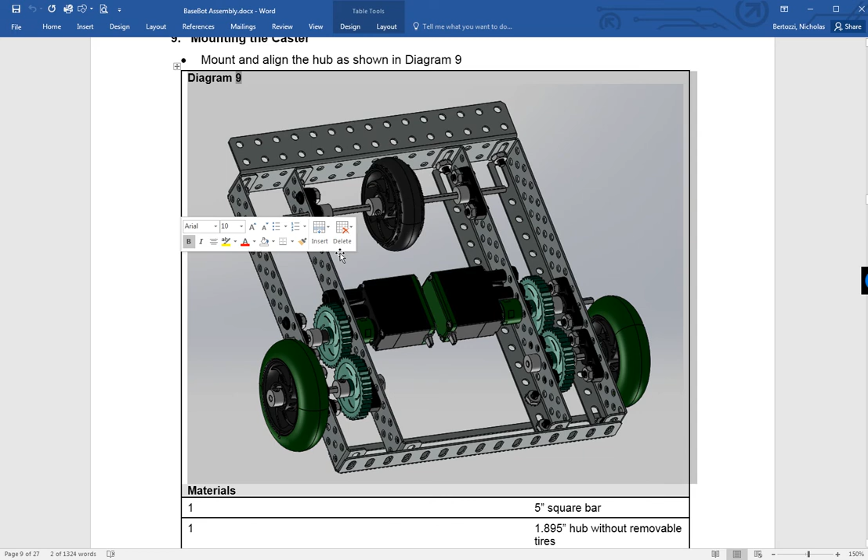So in general, if that was going to be important, if there was more weight on this, then we'd probably build some structure here so we could get the bearings a lot closer to the load.

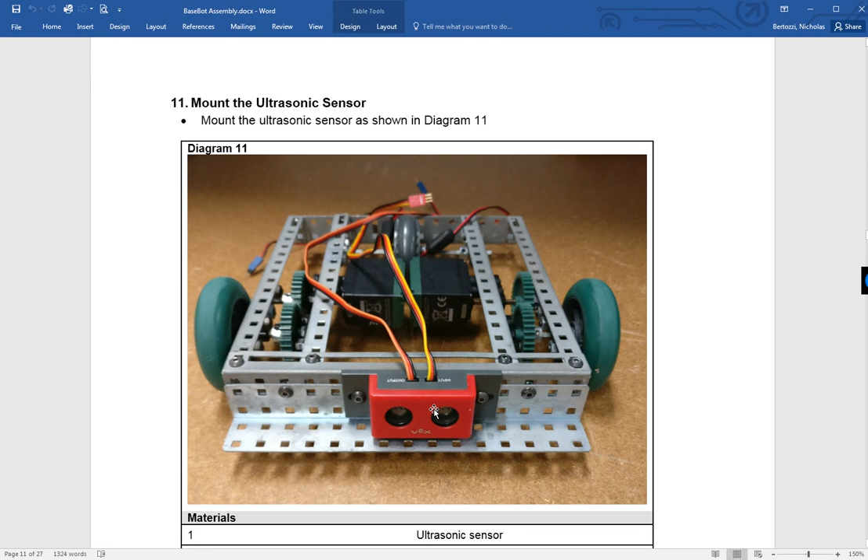So here's another shot of that. Now here's the ultrasonic sensor that we talked briefly about, so you're going to mount that on the robot.

And here's the standoff. Again, these are useful, they come in a variety of lengths, I think 12 different varieties. And you can also use those couplers to combine the standoffs together, so you can get pretty much any length you want.

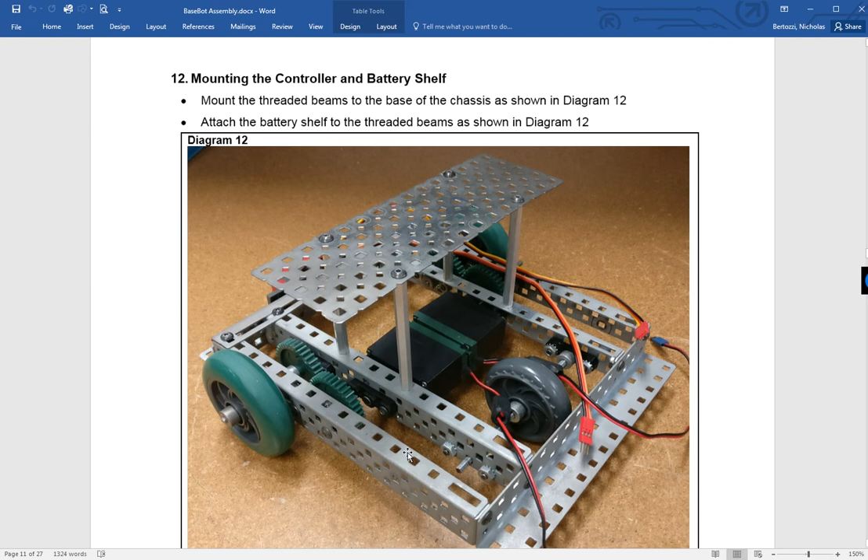And here's some more standoffs on this part as well.

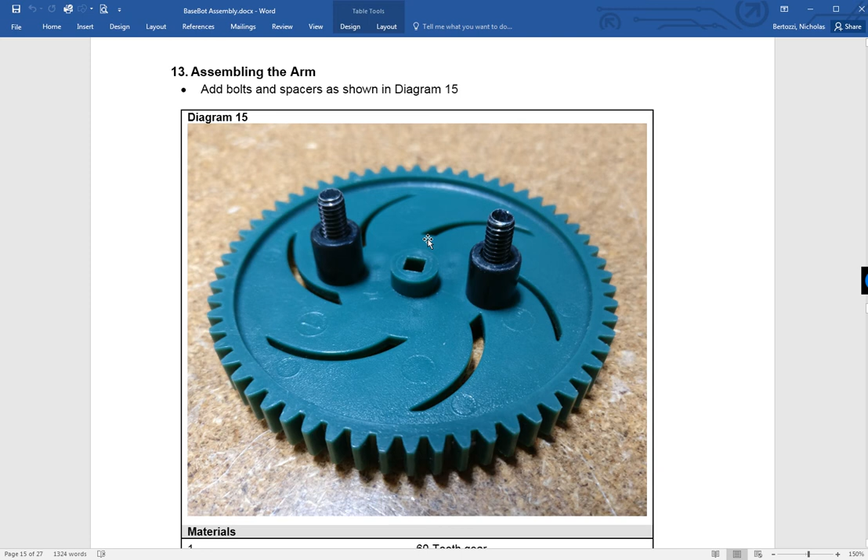Okay, so here's the gear that's going to be bolted to the arm. Rather than just try to turn that arm by using the 1/8 inch square shaft, we're going to use these spacers right here and actually bolt the arm right to the gear. That makes it much stronger.

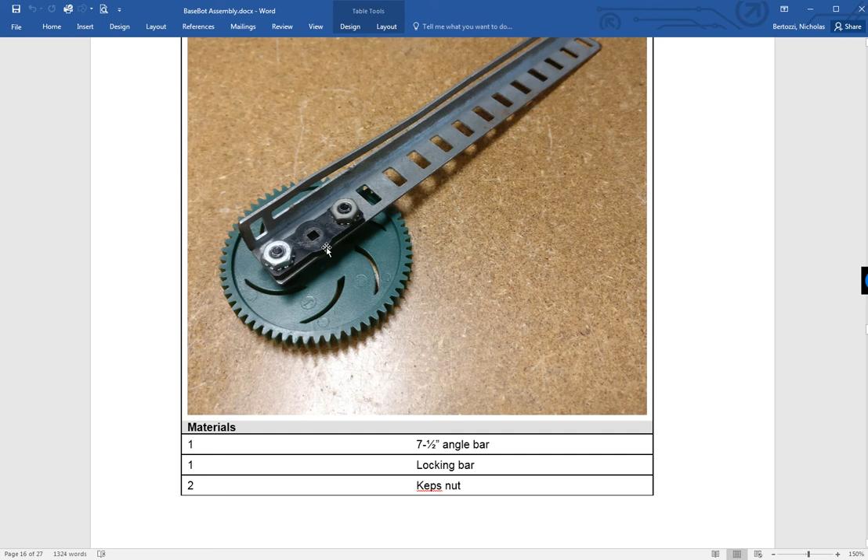So here's a shot of that, where instead of just, you have a pinion that's going to be driving this big gear, and then you want to transmit that torque to the arm. If you just had that going through this, even though this is a metal locking plate, it's still a lot better if you can bolt it actually to the gear.

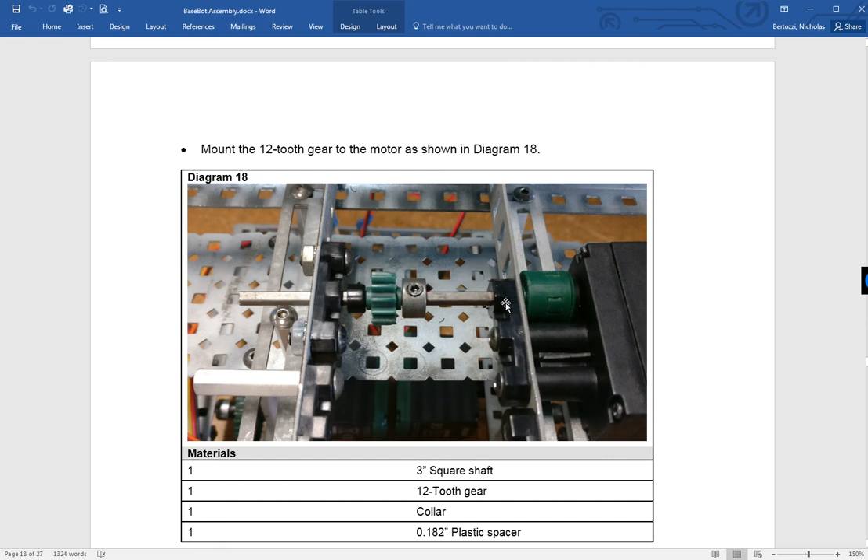And so here's the pinion. Again, we have bearings on both sides, so that all the motor has to do is apply the torque, or twisting effect. And here it's assembled.

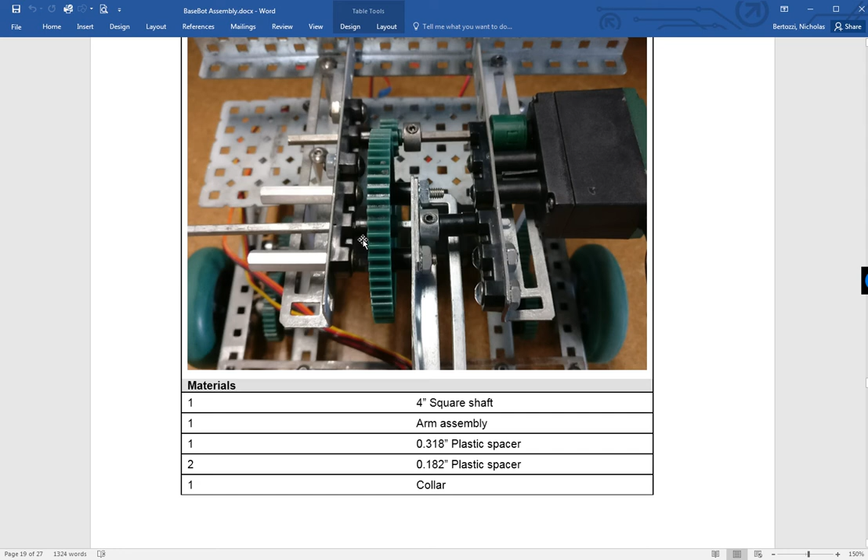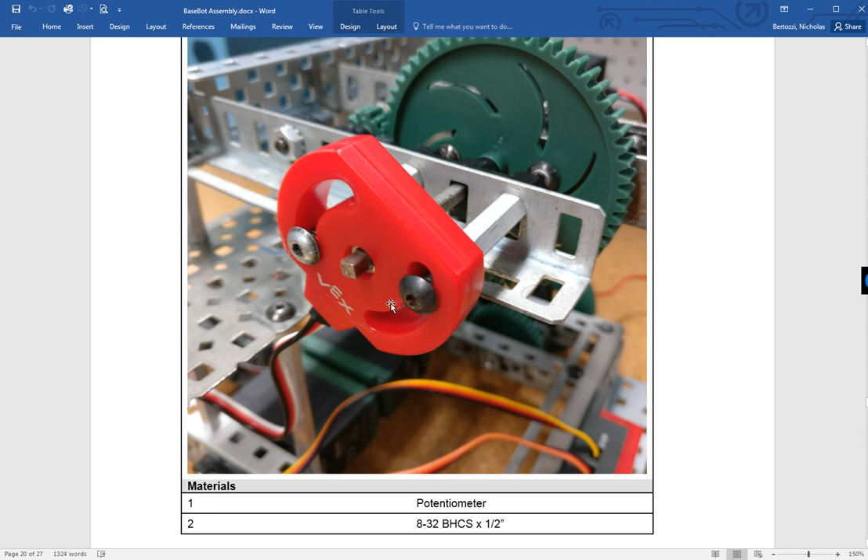Also, for that arm we're going to use a potentiometer so that we can have feedback in control in order to better control that arm. We'll know exactly what angle it's at, because we'll be able to use this potentiometer to determine the angle.

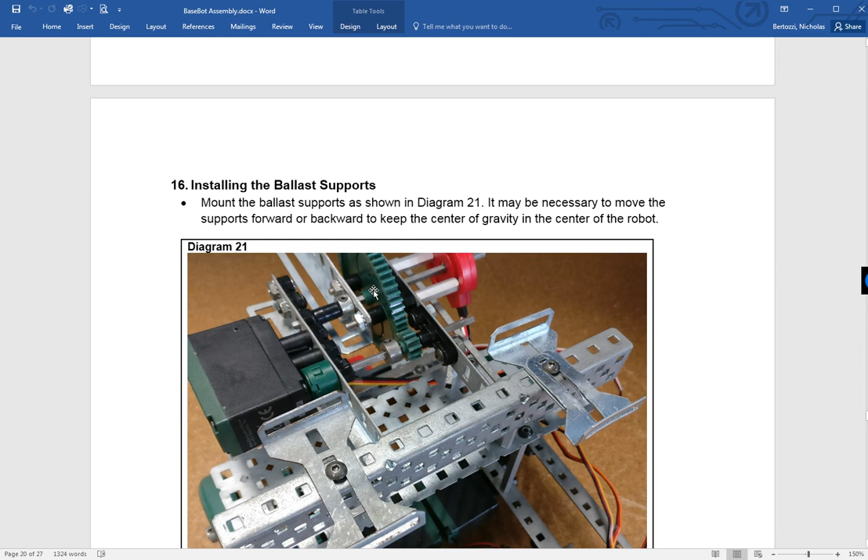And here's another shot showing the motor and the arm and then the potentiometer all lined up over here.

So hopefully that gives you a pretty good idea of the kinds of parts that are available from the VEX kit, and also at least some introduction to some design practices in terms of wheel drive and placement of bearings, things like that.

So you can go ahead and watch the video showing the actual build on the Basebot and read the instructions that are supplied. Hope this helps.